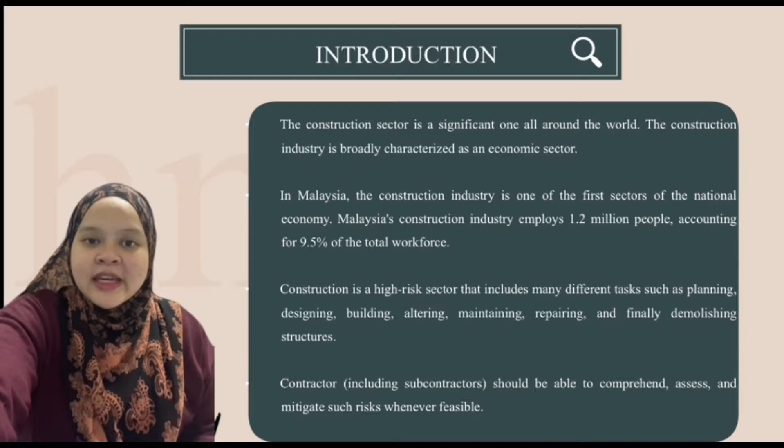Construction is a high-risk sector that includes many different tasks such as planning, designing, building, altering, maintaining, repairing, and finally demolishing structures. Contractors, including the subcontractor, should be able to comprehend, assess, and mitigate such risks whenever feasible.

First is fire risk. A fire risk assessment evaluates or examines fire hazards and measures to protect against fire. It also involves preparation to ensure the safety of those at risk. In the ideal scenario, employees, site managers, and safety officials work together to develop efficient fire safety programs based on risk assessment for fire.

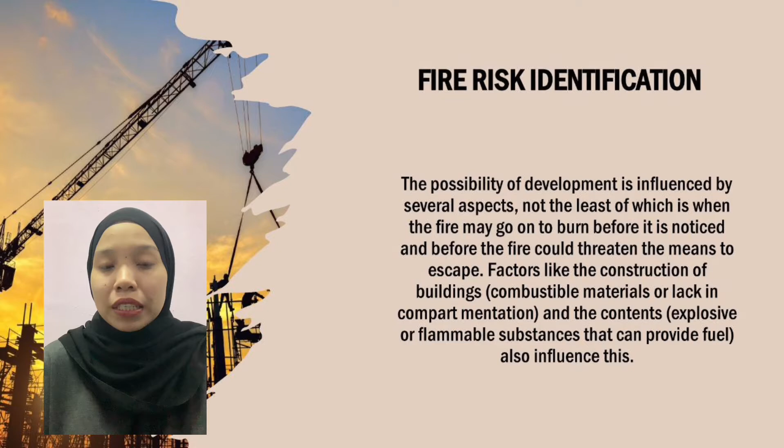The possibility of development is influenced by several aspects, not the least of which is how long the fire may go on to burn before it is noticed, and before the fire could threaten the means to escape. Factors like the construction of the building and its contents also influence this.

Causes of fire risk: first, electrical problems. Electrical problems are among the leading causes of workplace fires. This issue can occur in any industry and result in significant damage, injuries, and even fatalities.

Second is smoking materials. Improper use and disposal of smoking materials such as cigarettes, cigars, and e-cigarettes are leading causes of construction fire. Third is human error. Human error is often a contributing factor in construction fires. Mistakes or oversights can lead to dangerous situations and increase the risk of fire.

Next is effect of fire risk. First, loss of productivity. A loss of productivity is another significant consequence of fire. After a fire, employees may need to spend time cleaning up and repairing the damage caused by the fire, which can take away from their regular work duty.

Additionally, there may be insurance claims to file and paperwork to complete, which can be time-consuming and further disrupt the workday. Second is financial loss.

Repairing and replacing damaged equipment, materials, and property can add up quickly and significantly impact a business's finances. In addition, the business may experience a loss of revenue due to the interruption of normal operations or the need to close temporarily. This can be particularly difficult for businesses that may not have the financial resources to absorb the cost of a construction fire. Third is property damage.

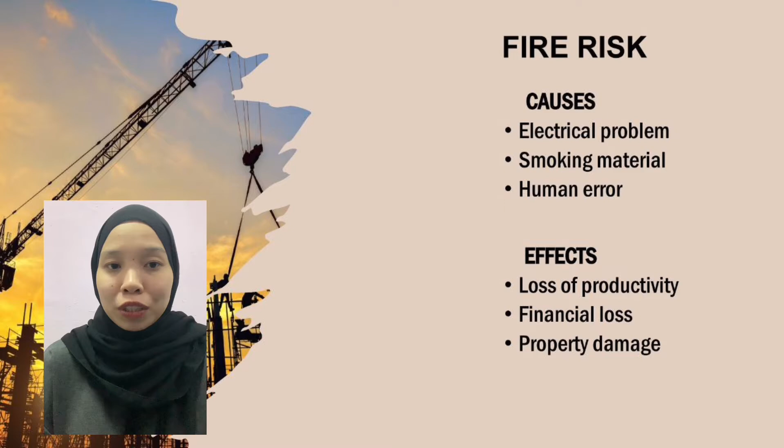Based on fire risk analysis, we can conclude that the severity of the fire risk is catastrophic, which is 5, and the likelihood category is 4. According to the causes and effects of fire risk, we should continuously review it to ensure fire risk continues to be adequately managed.

Regular inspection should be carried out to ensure that fire controls remain adequate and are implemented correctly. Regular checks should also be made of call points, detectors, sounders, firefighting equipment, and emergency lighting.

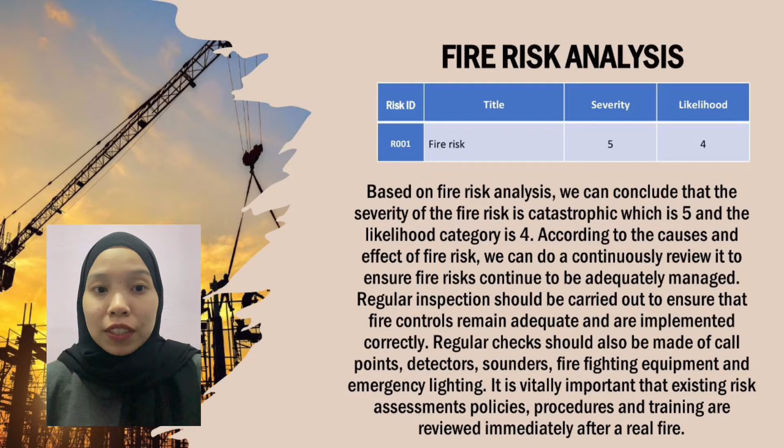It is vitally important that existing risk assessment policies, procedures, and training are reviewed immediately after a real fire. Based on the risk category, it's extremely high, which is 20. The manager and employees need to take immediate action to prevent this risk.

The next stage is to evaluate the fire risk. A fire risk is the likelihood that a fire will occur as a result of fire hazards, and the extent and severity of the damage which may be caused.

From this, it will be possible to determine what, if any, measures are needed for the control of the hazard and ensuing risk. The main factors affecting severity are the potential for the development of a fire and the number of people who could be harmed.

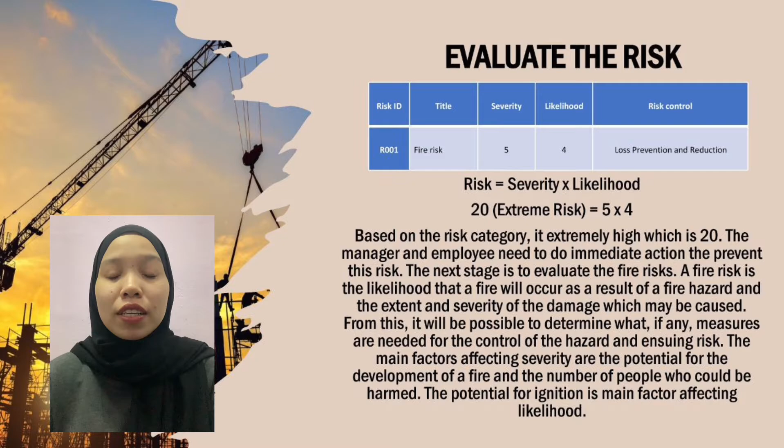The potential for ignition is the main factor affecting likelihood.

My name is Siti Khairul, and now I am going to explain the risk identification for our second risk, that is theft and burglary. In this risk identification, I am going to explain all the causes and effects on theft and burglary in the construction industry.

So, there is a serious risk of theft and burglary in this construction sector, and its causes and effects can have an influence on both projects and businesses. Construction sites are appealing targets for criminals because they contain valuable assets including machinery, tools, and supplies.

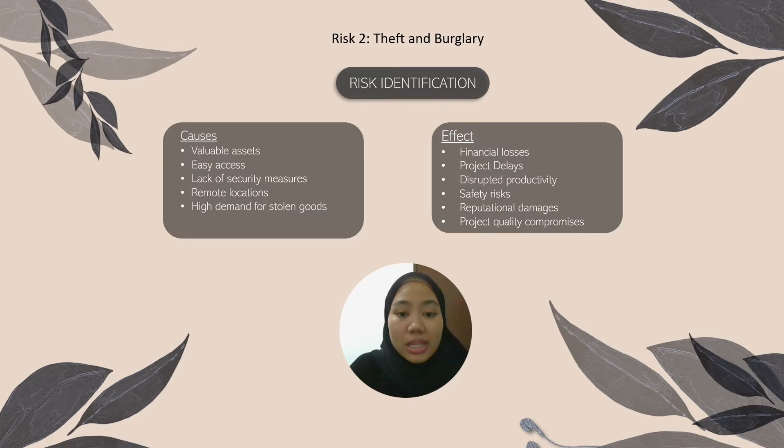Theft opportunities are created by inadequate security measures like poor fencing or insufficient lighting. The risk is also increased by convenient access to construction sites and remote regions. The theft and burglary impact on the building sector are significant.

The value of stolen property, the cost of repairs or replacement, and potential project delays can result in financial losses. These delays can interfere with project schedules and contractual responsibilities, affecting production as a whole. As a further factor in rising expenses, repeated theft events may result in higher insurance premiums.

When thieves tamper with structures or equipment, there are safety issues that could put workers in danger. Construction firms may lose customers, investors, and stakeholders' trust as a result of a deteriorating reputation. If stolen supplies are replaced with inferior ones, the quality of the project may be compromised.

Construction organizations should put a high priority on strong security measures, personnel training, and regular risk assessment to reduce these hazards. The use of precautions, including updating site fencing, engaging security workers, and setting up surveillance systems, can deter theft and burglary. Site security is improved by teaching personnel to spot and report suspicious activity.

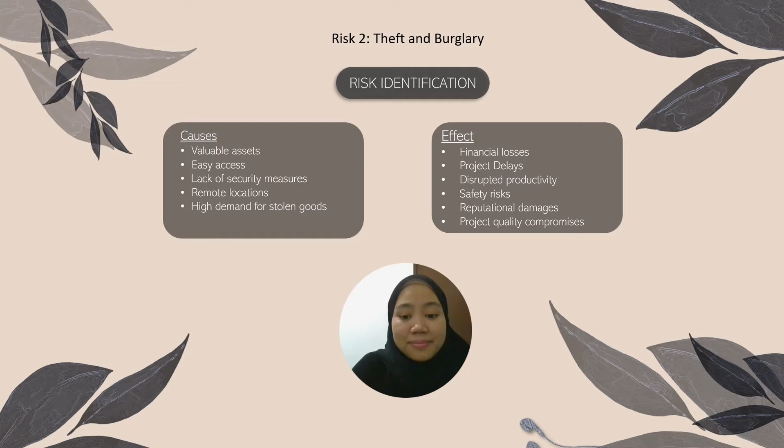Now, as for the risk analysis for the second risk, that is theft and burglary, the danger of theft and burglary is high in the construction sector, both in terms of likelihood and severity. For likelihood, thieves are drawn to construction sites because they contain valuable equipment and supplies, making them prime candidates for theft and break-ins.

The possibility can be scored as a 4, whereas 1 is low and 5 is high on the scale of 1 to 5. As for the severity, although theft and burglary in the building sector can lead to monetary losses, project delays and disruptions, they are normally not catastrophic or life-threatening occurrences. So the severity can be assessed as 3, with 1 being low and 5 being high on the scale of 1 to 5.

So to effectively manage this risk, construction businesses must put in place the necessary security safeguards and preventive measures. Companies can safeguard their assets, reduce financial losses, and guarantee successful project execution by taking measures to address the likelihood and severity of theft and burglary.

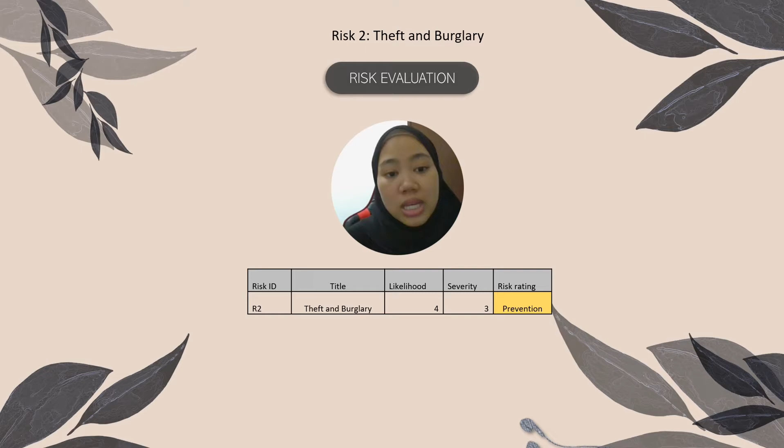So for the risk evaluation on theft and burglary, implementing strategies to lower the probability of theft and burglary incidents is the main goal of prevention. Construction sites can proactively reduce the risk of theft and burglary by putting in place strong security measures such as surveillance cameras, access restrictions, adequate lighting, secure storage places, and employee training programs. This plan attempts to discourage possible criminals, improve site security, and produce a secure workplace.

Prevention not only lowers the likelihood of theft and robbery, but also fosters a security-conscious culture among staff members and subcontractors. Construction sites can efficiently minimize the risk of theft and burglary, safeguard priceless assets, maintain project timetables, and safeguard the general well-being of workers by taking precautionary steps in order to improve operations in the future. With regard to theft and burglary in the construction sector, prevention is the advised risk management method. Thank you.

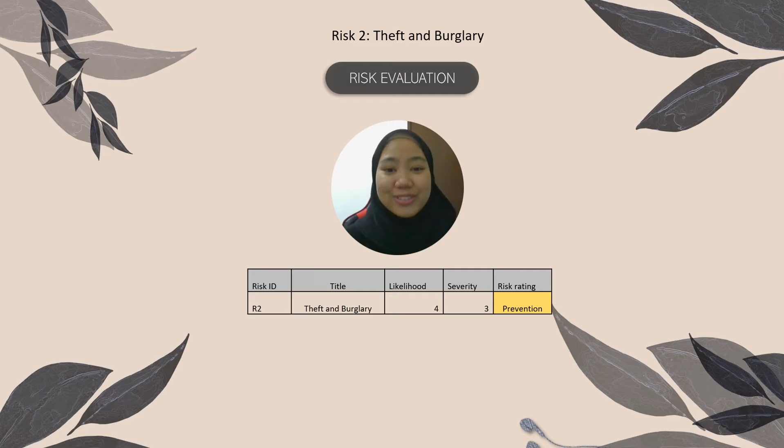The second risk is property risk of vulnerability to damage. It's caused by natural disaster, vandalism, construction materials and method, and also lack of maintenance. The effect of property risk can be financial loss, disruption of daily life and business operation, lack of safety, and it becomes a bad reputation for the building or company that manages the construction site.

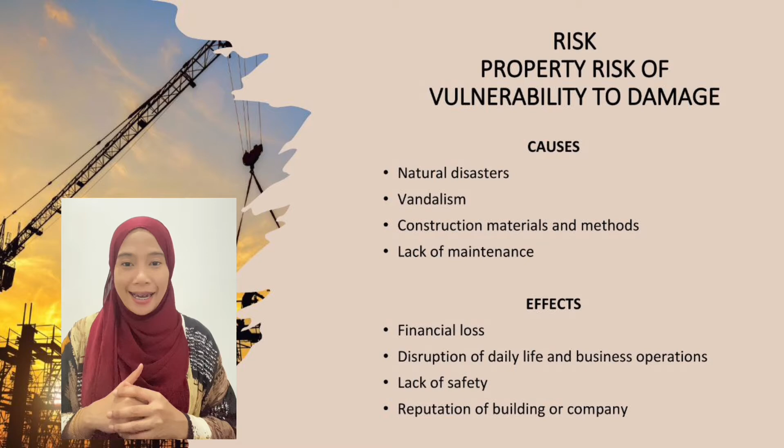For the risk identification, we can identify the possibility to occur numerous fatalities, the possibility to have vandalism in property. For example, if the property or building is not maintained properly based on scheduled daily maintenance, it will give, for example, vandalism because no one takes care of the buildings. Lack of safety, for example, if the lift is not properly maintained, it will be a lack of safety about the lift.

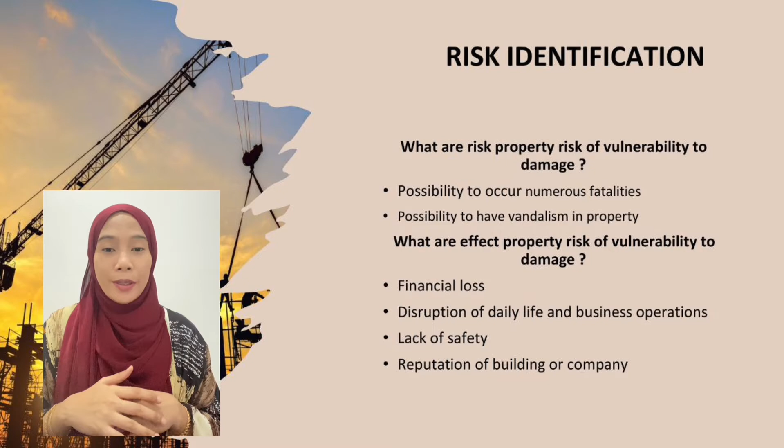It will affect financial loss. For example, if the building is not properly maintained, it will be a loss financially. For example, for the Highland Tower case, because of the Highland Tower collapse, the property around there has not been used anymore until now, and it will be a financial loss for the individual or company that built Highland Tower.

Based on data and historical data from outsourced sources, we can analyze the property risk of vulnerability to damage: severity is 5, which is higher, called catastrophic. If the accident happens on property, it can cause property damage and numerous fatalities in the buildings. For example, we can take the case of the Highland Tower collapse.

The likelihood category is 3, a conceivable event that might occur sometime in the future. As we know, all the property and building have a warranty of almost 5 to 10 years for the structure of the building.

So maybe for now we can say the normal structure failure, because the warranty is more 5 to 10 years, and after 10 years we can see the wall is breaking and can affect the financial loss after 10 years you buy the property. We can analyze that lack of maintenance, and not using proper method and material when building any property, can affect the safety of building, can cause financial loss because of damage such as vandalism, and will affect the reputation of the contractor or company that built the property. If the building is not properly maintained, vandalism can occur in so many places, and when vandalism occurs in a building, it will be viral and affect the property or company that maintains the whole property.

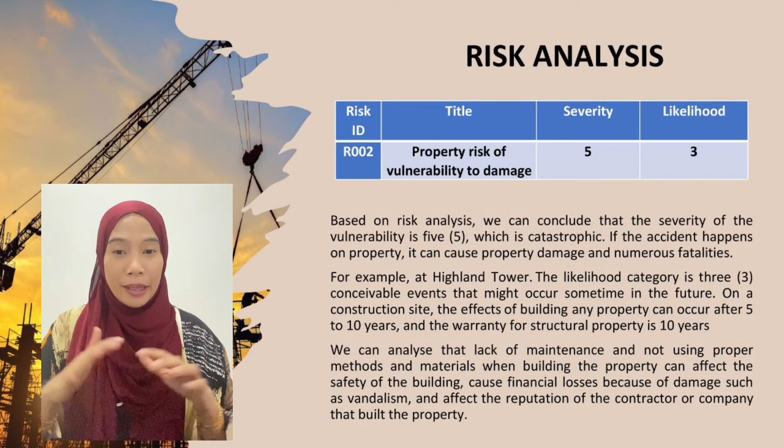For the risk evaluation, we can see the risk is 15, which is higher and requires immediate action to control the hazard, as detailed in the hierarchy of control. When a risk cannot be avoided, the frequency and severity of losses can be minimized. For example, if the property maintenance follows DOSH requirements, it can minimize the likelihood and severity of property risk. The requirement for property insurance is mandatory to all individuals and companies when buying a property, to avoid financial loss in the future.

For example, if you want to build any property in the Highland, you need to study the requirements by DOSH and requirements by construction line, to avoid accidents happening. So you need to study the method or material to be used to build property in the Highland. Is this method up to date? Is the material, the concrete, strong enough for the property in the Highland, to avoid all accidents happening in the future?

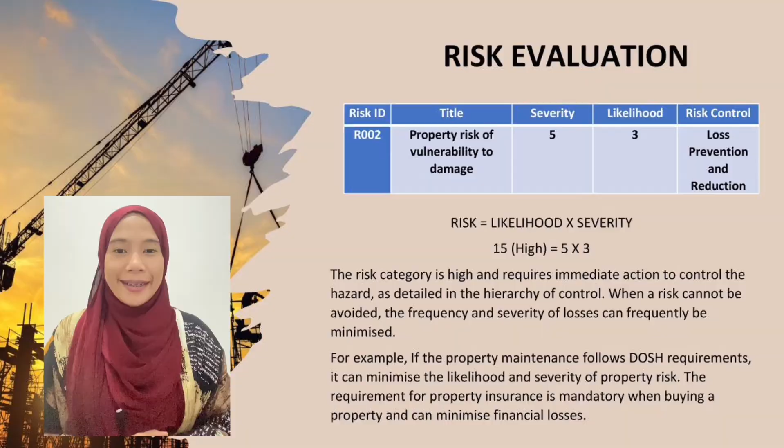Assalamualaikum and hello everyone. I will continue to present my point, which is unsafe building design. Unsafe building design can happen for a number of causes and have an effect on us. Any building or structure that is dangerous is one that could harm its residents or bystanders in the present or future due to its poor structural state.

There are several causes that buildings are designed unsafely to occupy, such as walls that are at risk of cracking, stairs that are poorly made, subsurface problems, roof defects, and parts of components that have already failed, like coping stones that have come loose and either fallen to the ground before or appear to be about to do so. Besides that, a defective roof can harm people inside or workers on the project, and in some cases can render your home unlivable.

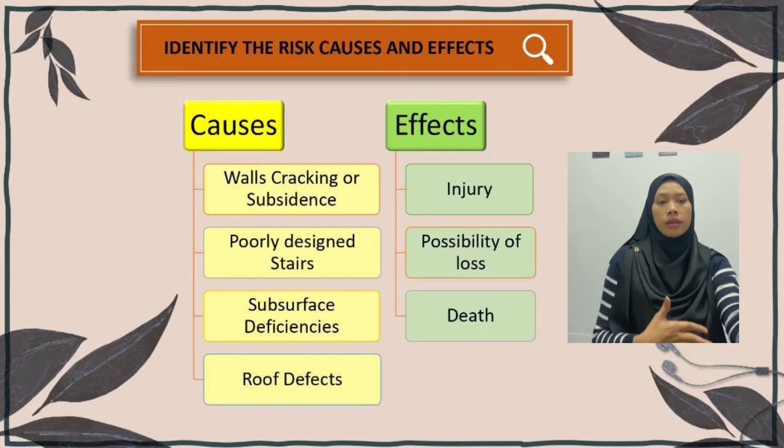Walls and floors can become cracked and damaged as a result of poor foundation design and construction. In extreme cases, poor foundations can trigger landslides that are fatal. Buildings can face issues like uneven settling into the ground, structure movement or shifting, or flooding if the ground surface is not properly compacted and set up for adequate drainage. Therefore, unsafe buildings run the risk of injury to construction workers and passersby, and in some cases, render your building unlivable.

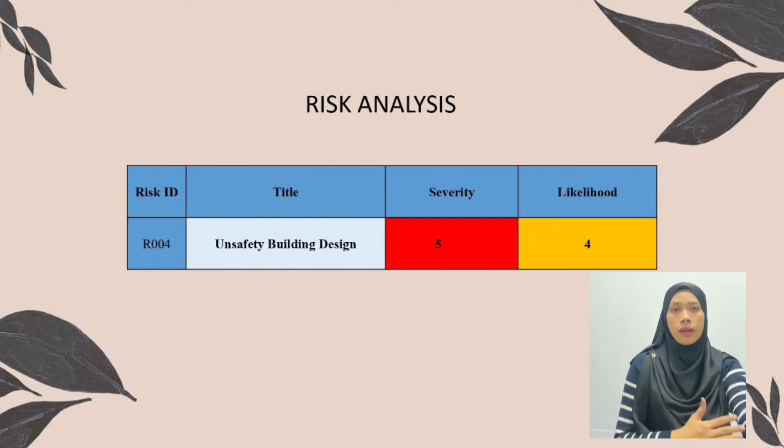Last but not least, knowing the potential causes of safety incidents in your building will help you figure out what precautions you have in place to stop them and lessen their severity. Review the current control measures after determining the severity and likelihood of problems. Next is the risk evaluation.

If the company follows the guidelines established for the construction industry, no accidents or injuries happen in the building, and unsafe building design can be avoided in this case. According to the result from Andoni 2022, while some risk cannot be avoided, others can be reduced with careful project bidding or changes to the scope of work. Unsafe building design is categorized in the catastrophic section of the risk assessment as having the potential to result in injury or even death.

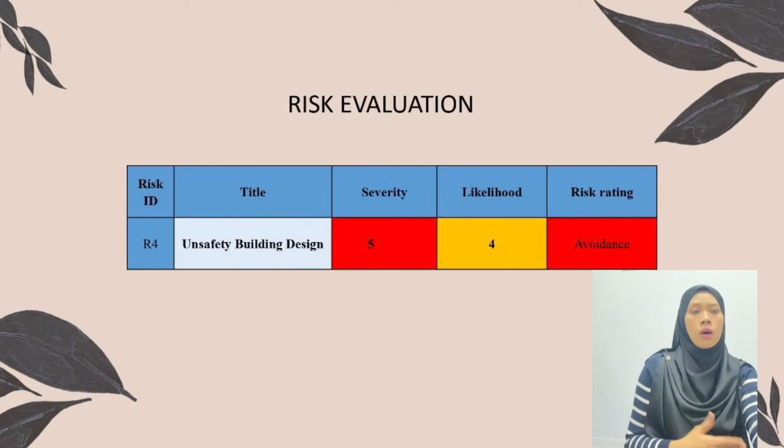However, based on Andoni 2022, it can be avoided by developing a construction strategy that can lessen the danger and the detrimental effect on users. Then you can control your probability for avoidable delays and financial losses by recognizing all the relevant hazards that relate to the design of your project and to the successful completion of the design. That's all for me.

What is a risk matrix? A risk matrix is a metric that is used during a risk assessment to define the level of risk by considering the category of probability or likelihood against the category of consequence severity. This is a simple mechanism to increase visibility of risk and assist management decision making.

Likelihood on a risk matrix represents the likelihood of the most likely consequence occurring in the event of a hazard occurrence. To put it another way, if a hazard occurs, what are the chances the most likely safety mishap will occur? As we can see in the table, for likelihood, green colors stand for rating 1 until 3, yellow colors stand for rating 4 until 6, orange colors stand for rating 8 until 12, and red colors stand for rating 15 until 25.

To get the likelihood rating result, you must calculate likelihood times consequences. First, we go for the fire risk. In the table, the likelihood for fire risk rating is 4, which is high risk, but the severity is 5, which is extreme risk. So 4 times 5 equals 20, which means rating 15 to 25 is a red color because it is extreme risk that will cause major loss of property or major loss of life.

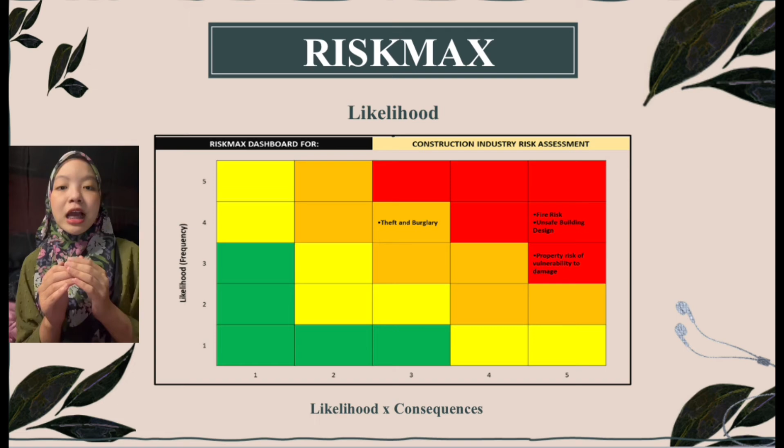Lastly, we go for unsafe building design. In the table, the likelihood for unsafe building design risk rating is 4, which is high risk, but the severity is 5, which is extreme risk. So 4 times 5 equals 20, which means rating 15 to 25 is a red color because it is extreme risk that will cause major loss of property or major loss of life.

Severity describes the highest level of damage possible when an accident occurs from a particular hazard. Damage can be low, moderate, high, or extreme. Green color is low severity, which means slight damage to property, minor injury to occupants, first aid required.

Second is yellow color, a moderate severity, meaning moderate damage to property, partial evacuation required, injury to occupants, medical attention required. Third, orange color is high severity, meaning large scale damage to property, complete evacuation required, occupants require hospitalization. Last, red color is extreme severity, meaning major loss of property, major loss of life.

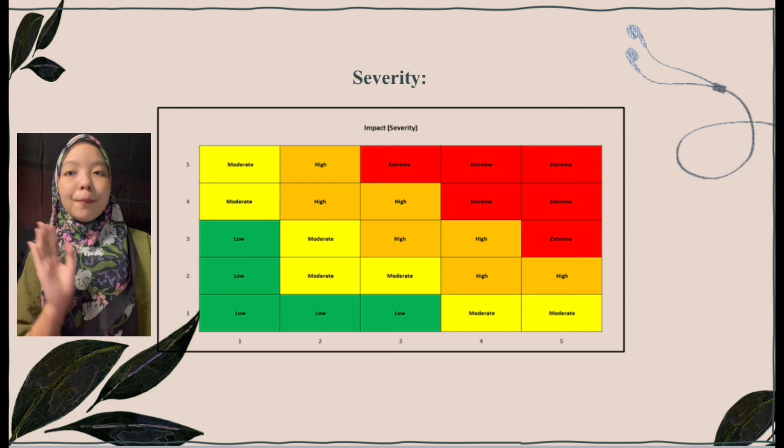There are numerous conclusions made on risk management strategy for the construction industry, particularly after completing a literature study and compiling data from a survey. These techniques have been deemed best practice for lowering and minimizing hazards in the construction industry.

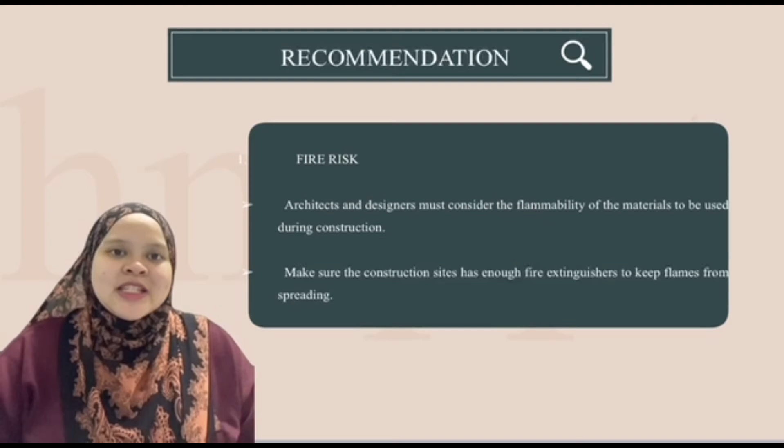First is fire risk. Architects and designers must consider the flammability of the material to be used during construction, the fire resistant capability and duration of this material, the versatility of the sealing material used in openings and other structures within and outside the building, and the organization and arrangement of escape routes inside the building at all times. Make sure the construction site has enough fire extinguishers to keep flame from spreading. If an unintentional fire starts, a properly utilized fire extinguisher can put it out. To guarantee that fire extinguishers always perform flawlessly, they must be approved and frequently maintained by specialists who undertake fire extinguisher testing.

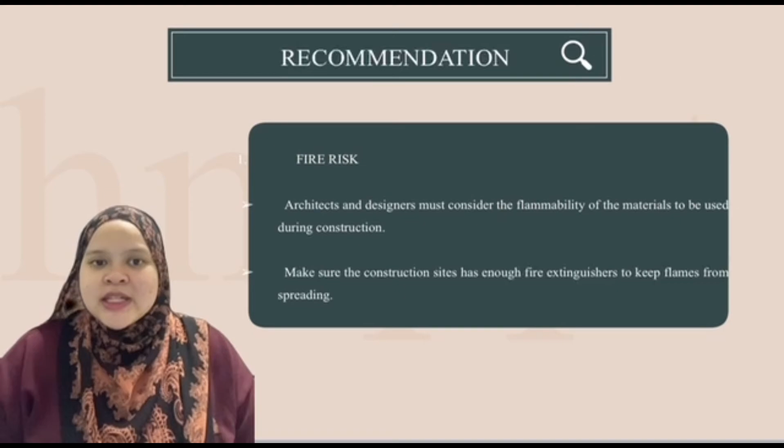Second is burglary or theft risk. Alarms can be used to increase site security, with or without cameras and tracking devices. Another emerging technology in use is geofencing, where a virtual or invisible electronic fence may be built around a building site. Create a policy to avoid theft and make sure all workers and contractors are informed of the guidelines and penalties for theft. This might involve removing scrap material for one's own use or for sale, as well as borrowing tools for use after hours or on site tasks. Establish a zero tolerance policy for violators and warn staff members and contractors that you will pursue legal action if they are found.

Third is property risk.

Contact your insurance provider if your business building is vacant to find out how your policy handles vacant properties and what your liability exposure is for anybody hurt while on your vacant property. If something should happen, modifying insurance policy as necessary can help reduce any possible expenses or liabilities.

An important component of owning and managing real estate is managing property risk. For the investment to be protected, laws and regulations to be followed, tenants to be satisfied, and a good reputation to be upheld, it is essential to recognize potential risks associated with a property, evaluate their impact and likelihood, and put a risk management strategy into practice.

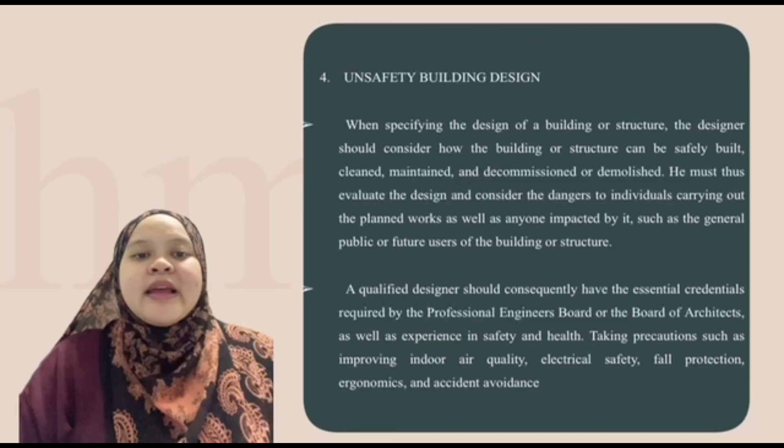A qualified designer should consequently have the essential credentials required by the Professional Engineers Board or the board of architects, as well as experience in safety and health, taking precautions such as improving indoor air quality, electrical safety, fall protection, ergonomics, and accident avoidance.

The selection of takaful, first is general takaful. General liability insurance covers a company for physical harm, personal injury, and property damage caused by the company's activities, goods, or injury that occurs on the company premises. Although commercial general liability is considered comprehensive business insurance, it may not cover all hazards that a company may encounter.

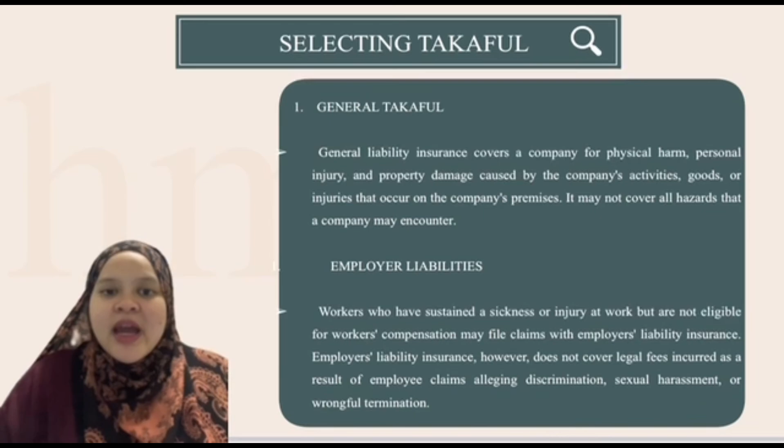Second is employer liability. Workers who have sustained a sickness or injury at work but are not eligible for worker compensation may file a claim with employer liability insurance. It is a sort of liability insurance and may be combined with worker compensation to further shield a business from the expenses related to accidents, illness, and fatality at the job. Employer liability insurance, however, does not cover legal fees incurred as a result of employee claims alleging discrimination, sexual harassment, and wrongful termination. Third is contractor all risk.

Contractor all risk is one of the most well-known insurance policies used in a construction contract. It is a short-term insurance coverage that covers the construction contract work. Furthermore, contractor all risk takaful is specifically created to cover engineering projects involving both building and other ongoing civil engineering activities. Etiqa and Zurich are among the companies that provide contractor all risk takaful in their service.

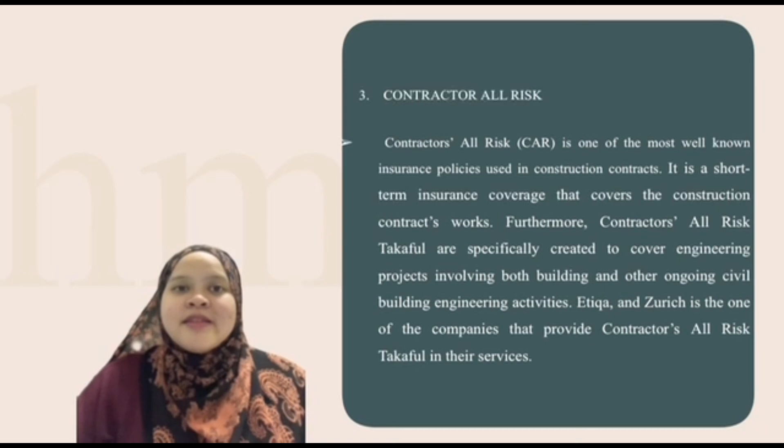The Malaysia Economic Report 2015 estimates that Malaysia's construction industry contributed about 8% of the country's GDP in 2015. As a result, construction-related activities are common, which increases the risk of loss and damage they may cause.

General liability insurance covers property damage, bodily harm, and personal injury. All of them are third-party damage and injury, and they are all linked to the actual job that's been done. Contractor all risk insurance policies differ, but in general, they are meant to protect against damage caused by external factors. This can include things like natural calamities as well as intentional damage, weather, gas explosion, fire, vandalism, theft, and other natural factors like flooding and earthquake, which may or may not be covered.

Contractor all risk coverage is more restrictive and only lasts until the project is finished, the property is sold, or the owner moves in, whereas general liability might cover you for property damage even after the job is finished.

To improve the product, the construction industry or company must widely promote the benefits of acquiring a contractor all risk policy, such as extensive coverage, enhanced peace of mind, and increased business potential.

According to Muhammad Fauzi and Abdul in 2012, only 69% of Muslim contractors have experience acquiring contractor all risk takaful for building work contracts, and 6% of respondents will consider it only if the cost will not have an impact on the insured.

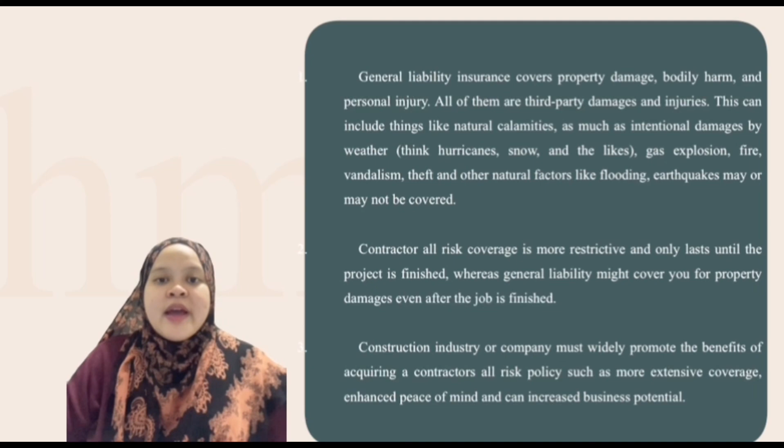For conclusion, a construction risk assessment helps determine which parties are at risk, creates awareness of existing risks on site, assesses current loss prevention measures in place, ensures contractual requirements are upheld, and decides whether additional controls need to be instituted. A proper risk assessment is essential to prevent accidents at work, reduce injuries, and even save lives at work.

By highlighting specific hazards and potential threats, risk assessment helps generate appropriate awareness of them among employees and managers. Secondly, construction companies must have takaful or insurance products to increase safety and well-being of workers, improve company reputation, and avoid costs associated with workplace accidents.

Last but not least, the reason why construction workers need takaful and insurance products is because the risk of bodily injury and physical damage to property is higher in construction work than in other industries. General liability should be an important part of your construction insurance coverage.